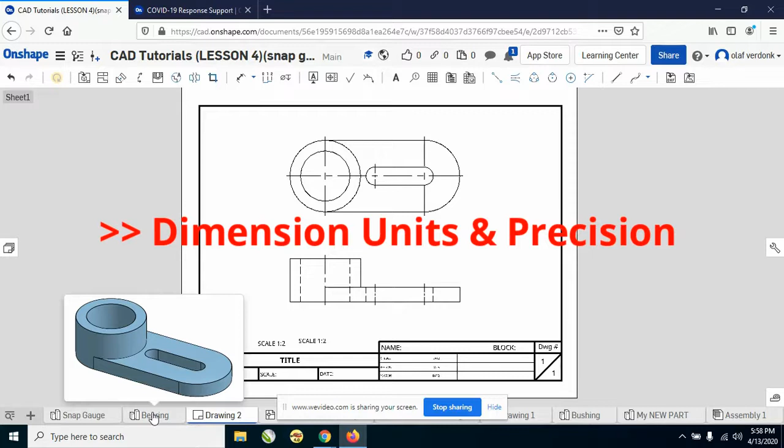In this section, we will be discussing how to adjust dimension units and precision, how to properly dimension an object. We'll be discussing some basic dimensioning philosophy. We'll discuss line thickness settings and proper printing. So let's get on with completing the drawing and layout of the bearing from lesson number 4.

So previously in part number 1, we discussed how to import a title block, insert views, how to scale our views, and how to get the proper orthographic views with hidden lines turned on, turning tangent lines off, and adding center lines.

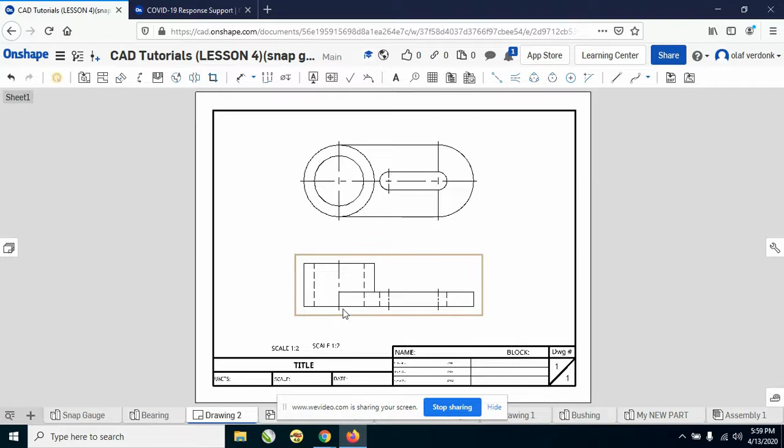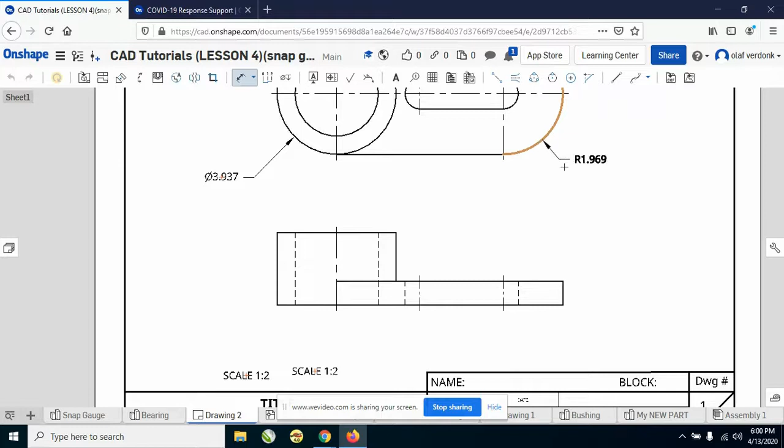So in order to add dimensions, we just need to use the dimension tool right here. It is very intuitive, so I can just click on the edge of an arc and it will automatically determine whether or not that's a full circle, in which case it's dimensioned by diameter, or whether it's just an arc or a partial circle, in which case it's dimensioned by a radius.

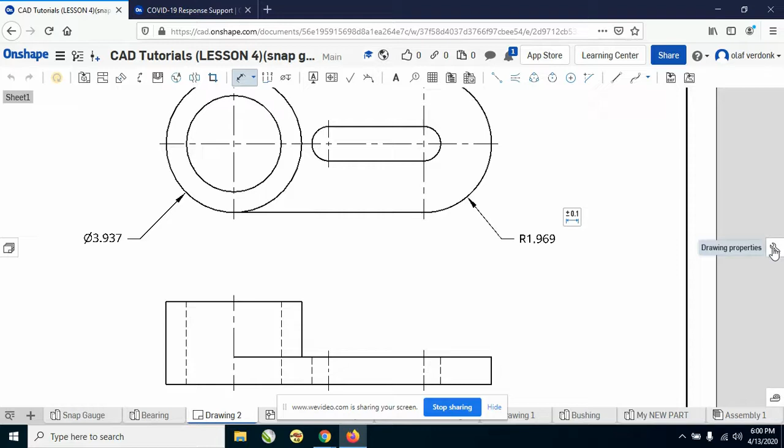Now you'll notice that the numbers are very odd. These don't look like very clean numbers. Well, I'm actually dimensioning it currently in inches right now. And this is a metric part, so we need to adjust our units to be metric units. In order to change the units, I can just go over to my drawing properties, the wrench, and if I click on that wrench, the very first tab is for units and precision.

You'll notice for my options for units, I have inches as well as inches fractional. So understand that there's a difference between inches and inches fractional. Inches gives me decimal inches, as you can see here, or inches fractional will give me fractional inches, so 3 and 15/16. And I can obviously do millimeters so that I'm in metric. And again, I can change my precision.

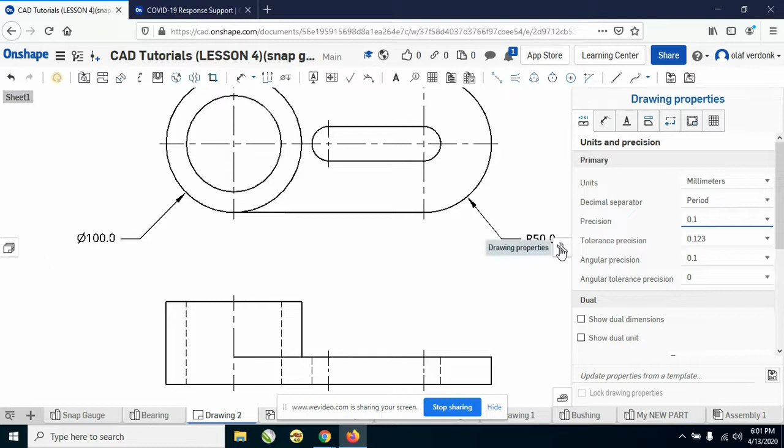So for this object, most of the dimensions were whole millimeters, so I do not need the precision of all the zeros. So for right now, I can reduce that to 1 decimal point, and now I can go back to dimensioning this object. I have several things to dimension here, several arcs. I can click on any kind of edge or flat surface and it will dimension that for me.

Here you can see from this edge to this edge of the cylinder is 100 millimeters, which is the diameter, which I already have dimensioned here. So having that dimensioned twice is actually a really big no-no. So let's not do that. I'm going to hit escape on the keyboard. I'm going to select that dimension and delete it.

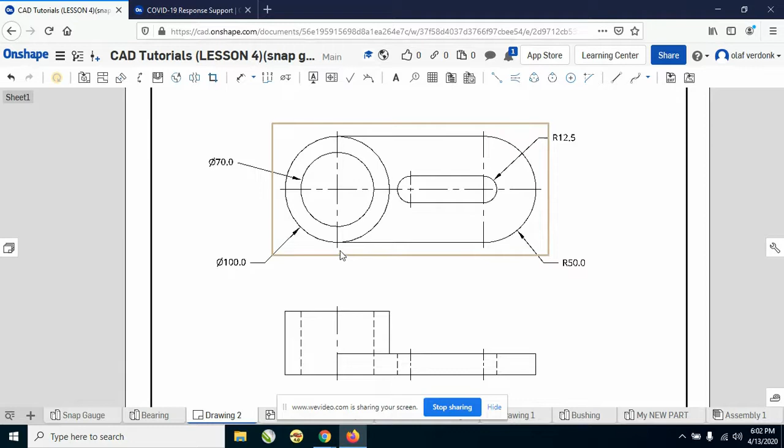Since I have all the radii and diameters dimensioned up above, what I really need is the distance from the center of this arc and circle to the center of that arc over there. If I were to simply click on the edge of a circle and then click another arc or circle, it will automatically assume that I'm dimensioning from center to center.

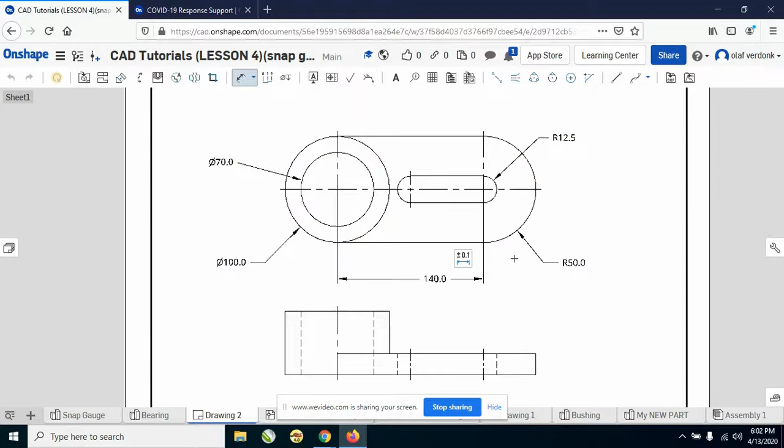But you'll notice, if I zoom in here, that dimension covers up that center line that I created from part 1 of this video tutorial. So technically that doesn't go very well because that covers up that center line and we no longer have a gap for the extension line. The extension line should never touch the object, and we've lost that gap. So I'm going to hit escape on my keyboard again. I'm going to select this dimension and delete it.

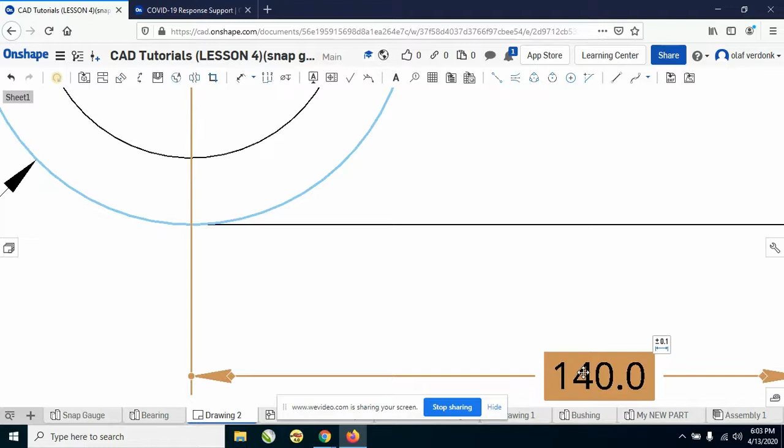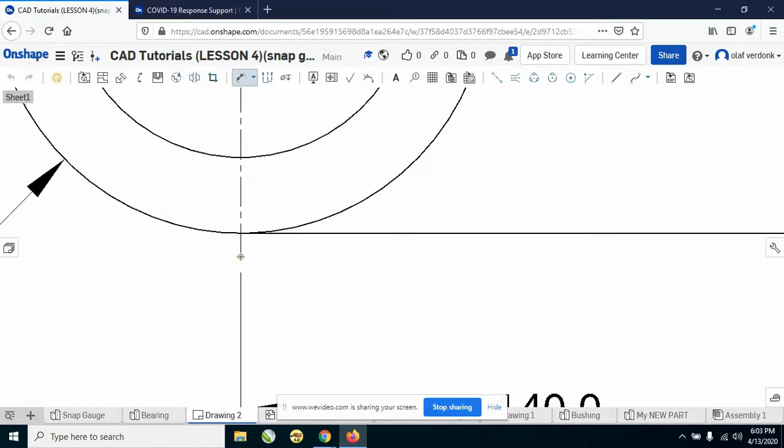And this time, when I select my linear dimension tool, I'm going to select the end of the center line here and snap to the end of the center line here and insert that dimension. And you'll notice, one, the center line does not get covered up with the extension line, and the extension line has its correct gap from the edge that it's actually dimensioning. So it never touches the edge that it's dimensioned from.

Now another thing that is important is that the dimensions are never too close. So if I hit escape on my keyboard, I can grab any dimension and move it wherever I want. Obviously, this could be on the inside, but again, that ruins the communication of size. So it's important that dimensions are to the outside. But again, it's also important that dimensions are not too close.

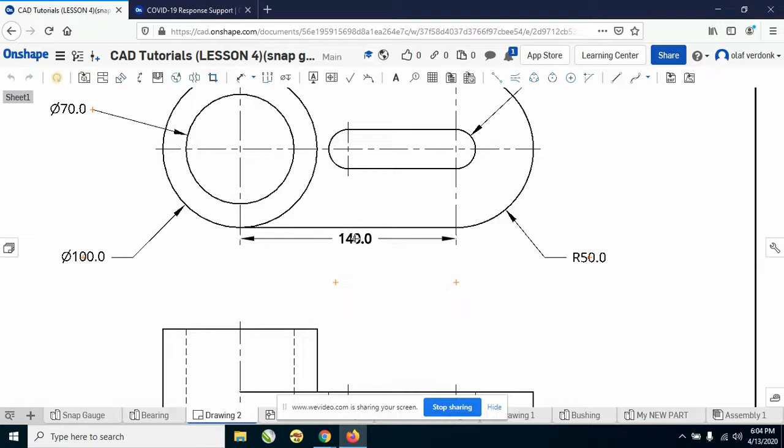If the dimensions are too close, they begin to blend in with the shape of the object, and that's not very good. So I think it's a much better idea to space away, at minimum roughly about a ½ inch, so that it's a healthy space away. And many people might think that I really want a dimension from end to end here. I want to know how long is this object.

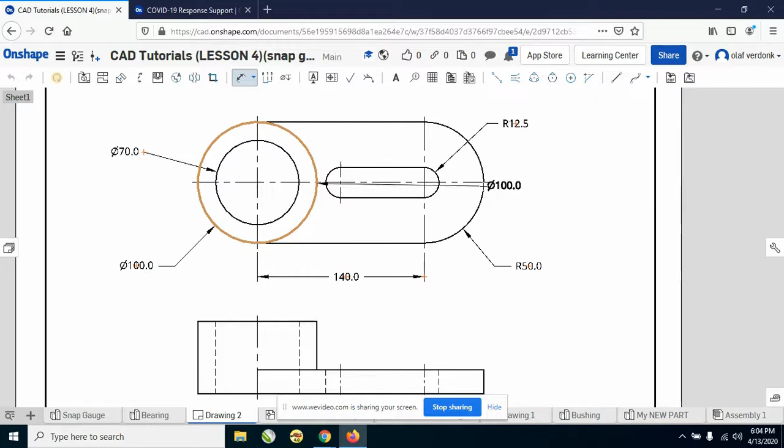Well, if I were to try to dimension that again, when I click on this edge here, and then I click on this edge over here, it always assumes I want to go center to center. And that actually is a very good assumption. You want that. You really don't want to dimension from the edge of an arc to the edge of an arc. You really need to know where the centers of those arcs are.

So dimension center to center, and then just add on whatever this radius is, and add on whatever this radius is right here. If I have those dimensions in a nice row, I can just add them up. The only confusing bit is that this is a diameter. It is a cylinder, so I should dimension it by diameter. But it would be nice if it was radius, so that way I could calculate the total length.

So that would be half of this 100, which would be 50, plus 140, plus another 50. So it really should only be 240 millimeters long from this edge of the arc to this edge of the arc.

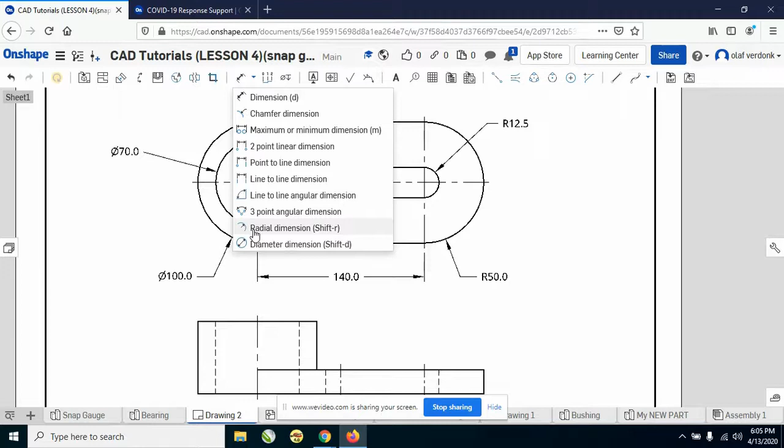I could, in my dimension options here, if I actually open up the menu of different dimensions I can use, I could do this with a radial dimension. So I could click on this and actually get a radius here. So I could get rid of this dimension, and with this as a radius, inference off the other dimensions so they're all lined up nicely.

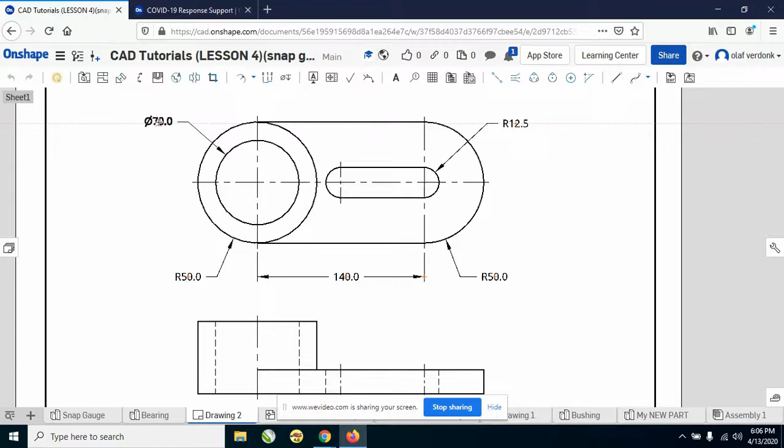And I have these dimensions all in a nice row, spaced away from the object nicely, and I can easily calculate the length of this object. It's always nice, again, to have your dimensions not too close to the object and kind of spaced away nicely.

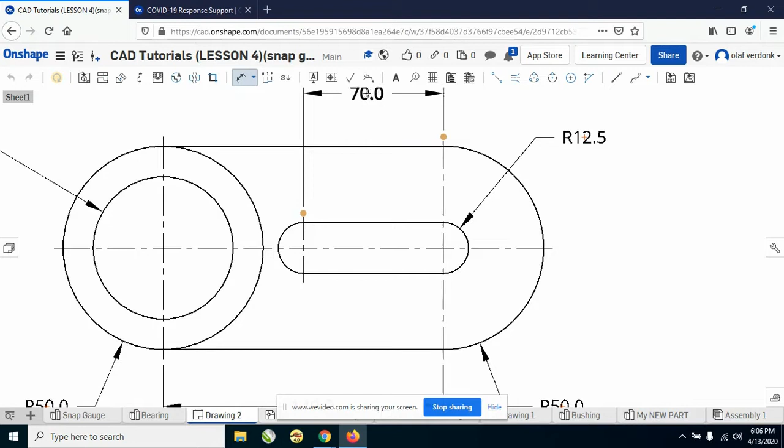I need to dimension the center of this arc and the center of this arc. So I'm going to use my linear dimension tool, and I'm going to dimension from the end of center line to the end of center line. And I'm going to put that dimension up here so it doesn't interfere with the 140. Hitting the escape tool, I can reposition my dimension so that it looks nice. It's spaced away and not too close to the object.

But it would be nice to know what is the complete length of this slot. Well, that's going to be 70 millimeters plus 12.5 plus 12.5 on the other side. So I would ideally like to move this 12.5 so that it is in line or aligned with the center to center distance.

And to communicate that both ends are 12.5 millimeters, I can actually double click on this dimension and it opens up a little window where I can put in a suffix, so something at the end of this. So I can put a capital X 2, so times 2. And if I click in this open space now, you can see that that shows up. 12.5 times 2, so 12.5 on this side, 12.5 radius on that side.

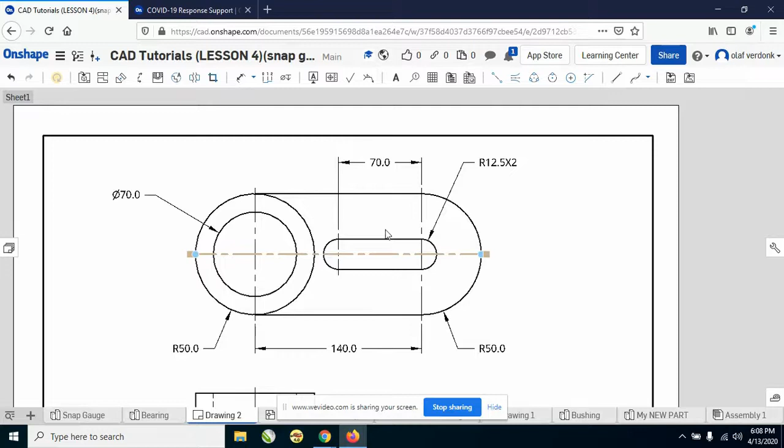So 70 plus 25 would give us 95 millimeters total from this end of the slot to that end of the slot. If you really want to be precise, I could actually add one little space, my space bar, and that looks just a little bit more clear.

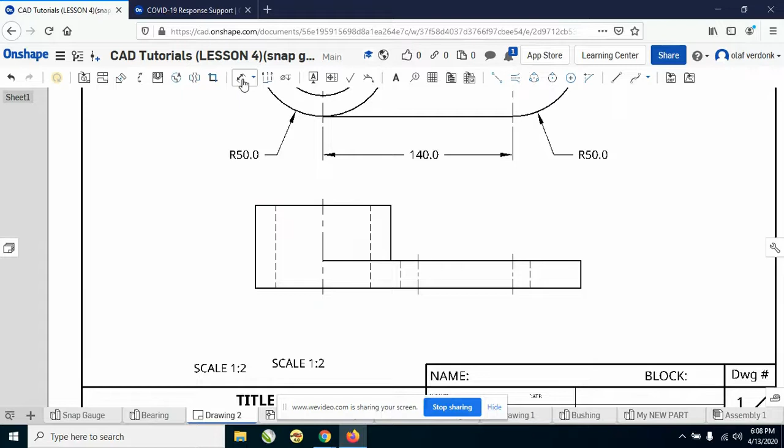Now all I have left is to dimension my front view, and there's not many dimensions left that I have to deal with, but I can dimension the height of the cylinder, 60, and the height of the base, which is 20. Now you'll notice over here the dimension lines are outside of the extension lines, and that is okay. And notice once again that the extension lines don't actually touch the object. OnShape is preset to give you a specific gap there, so you're all set there.

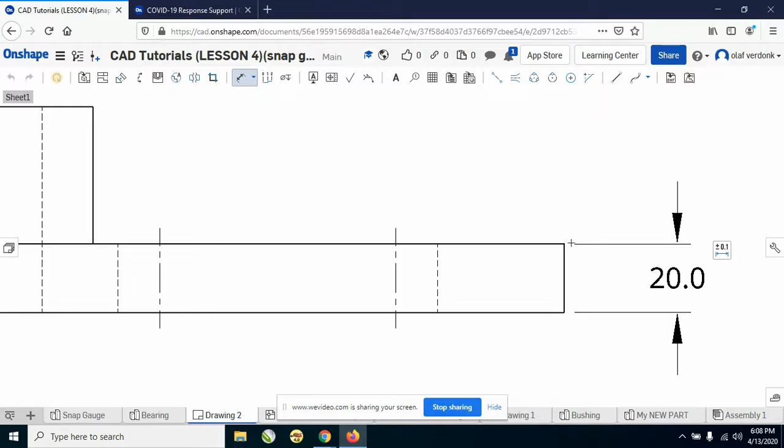So we are all set dimensioning this object. All we have to do now is to fill in the title block with our units and our scale and our date and the title. So let's go ahead and do that.

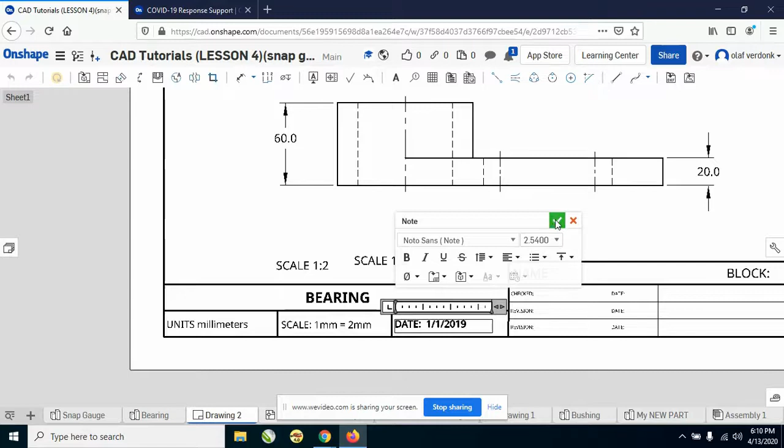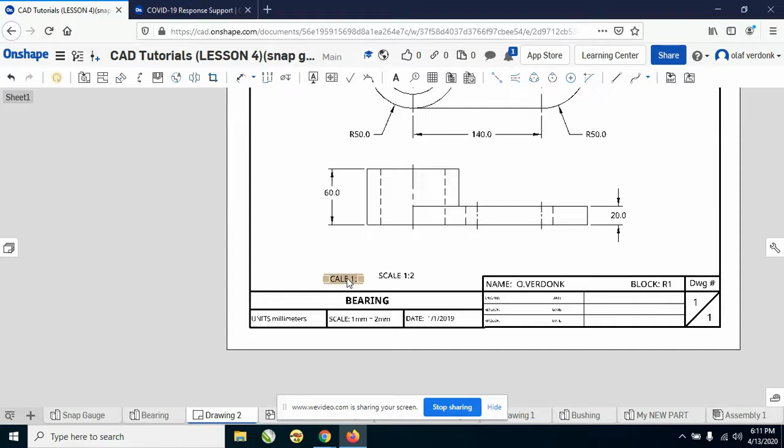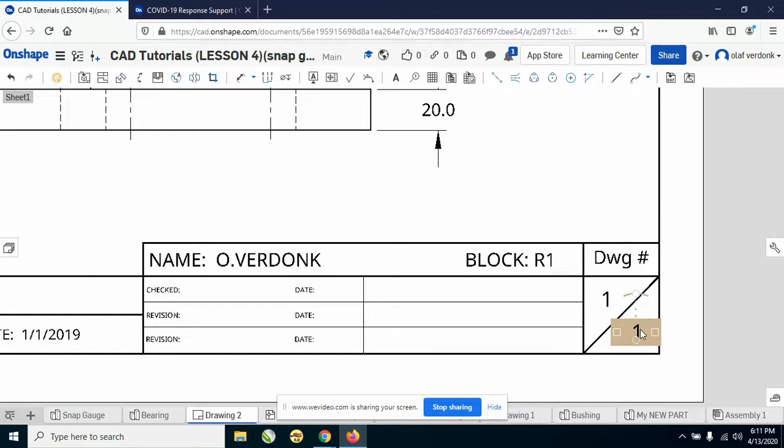Okay, now that I've actually filled in the title block, I don't need these two little scale labels, so I can select them and delete them. They're no longer. And this last little piece right here, the 1/1, this is the drawing number. So this is drawing 1/1. If there were multiple drawings of an object, I could have this drawing 1 of, say, 5, 2 of 5, 3 of 5, etc. The last thing we need to do is make a proper printout.

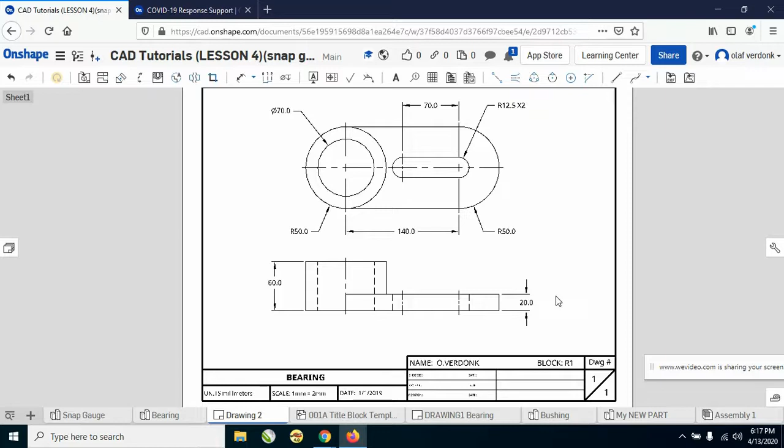Now that I've completed dimensioning my object and filling in my title block, now is the time for me to make a few adjustments to the line thicknesses so that I get a proper printing. It's important that the visible lines print out thick. The hidden lines should be medium thickness. The center line should be thin. Extension and dimension lines should also be thin.

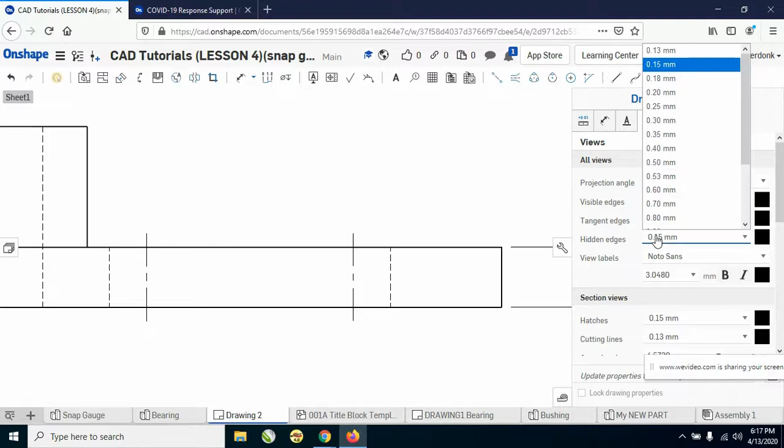To make those adjustments, I need to click on the wrench for the drawing properties and go to the views. Under views, you can see that they have thicknesses for visible lines, tangent lines, hidden lines, etc. So I want to make the visible lines thick. So I'm going to make those 0.53, and the hidden edges should be medium thickness. So medium thickness would be roughly about 0.25.

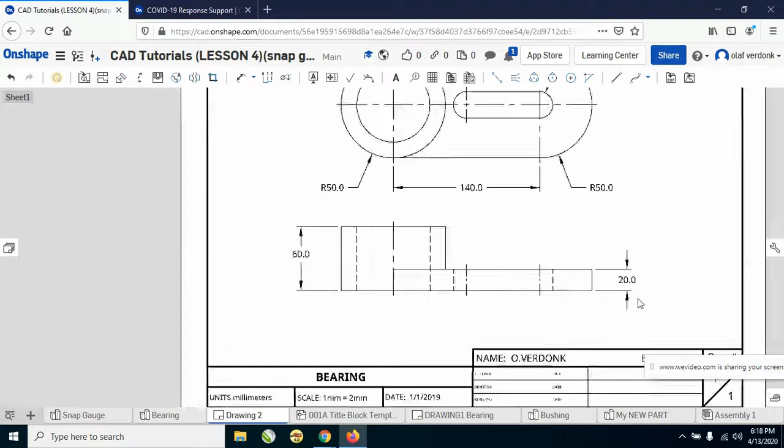And finally, cutting plane lines should actually be thick as well. So I choose the 0.60 millimeters thickness for the cutting plane lines. So now when I go to actually print this out, I need to just go to the 3 bars next to where it says OnShape, and I would say print.

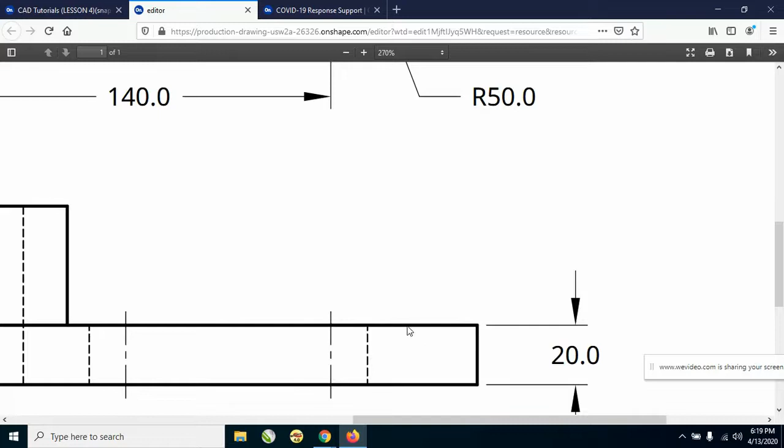Here's a print preview, and if I were to zoom in here, you should see that the visible lines are nice and thick, the hidden lines are medium, center lines, extension lines, and dimension lines are thin, so we'll get a really nice printout.

Now that we've completed the printout for the bearing, you should now know how to create a drawing / layout in OnShape for pretty much any object. You know how to import the title block, how to adjust the orthographic views, how to add dimensions, how to fill in the title block, how to make some adjustments to how the printout works, and you should have enough skill to practice on your own.